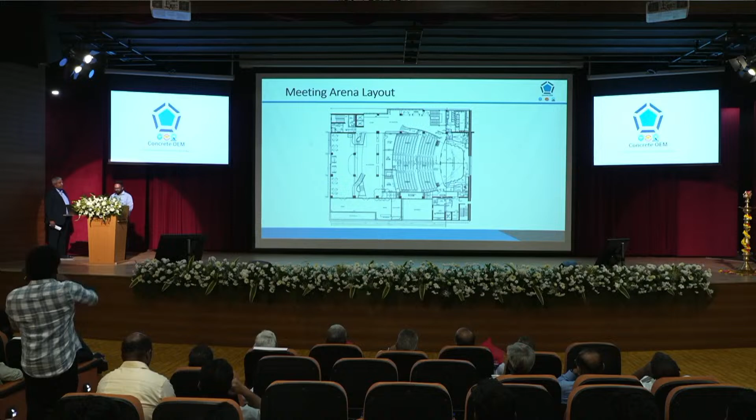The same procedure goes for the dining area on the 6th floor. When you hear the alarm, please remain alert and prepare yourself for any possible evacuations. And please leave the floor immediately by using the exits which is nearest to you.

Proceed to the nearest emergency exit, which is located on the front and back of the floor, as mentioned earlier. After reaching the 0th floor, exit via the main entrance and gather at the assembly point to the left of D block. Do not use the elevator in case of fire or earthquakes, and do not crowd the doors.

There is no smoking permitted inside the auditorium, and please put your phone on silent.

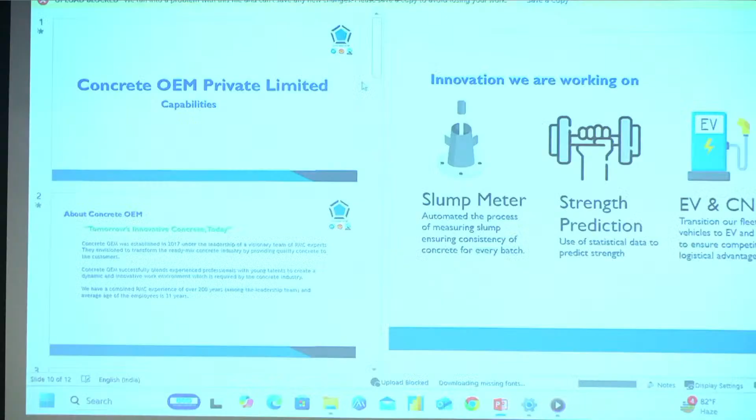So if you see in the video, it's very clear our tagline is mentioned as 'Tomorrow's innovative concrete today.' So, to brief you, Concrete OEM was established in 2017, which is almost 7 years now, when many of them asked me, sir, what is OEM?

As you all are aware, we brought the concept of Original Equipment Manufacturer, trusted and worthy, from the mechanical industry to the civil industry. That is how our managing director thought of this concept of having OEM interlinked with concrete in the ready-mix industry. That is how we got Concrete OEM Private Limited established in 2017.

So we have a leadership team of RMC experts that have provided experienced solutions wherever required, and it has been blended with different professionals. Each and every process has several experienced people. Our average employee age, if you see, is just 31 years, and we have an overall experience of 200 years of professionals working with us.

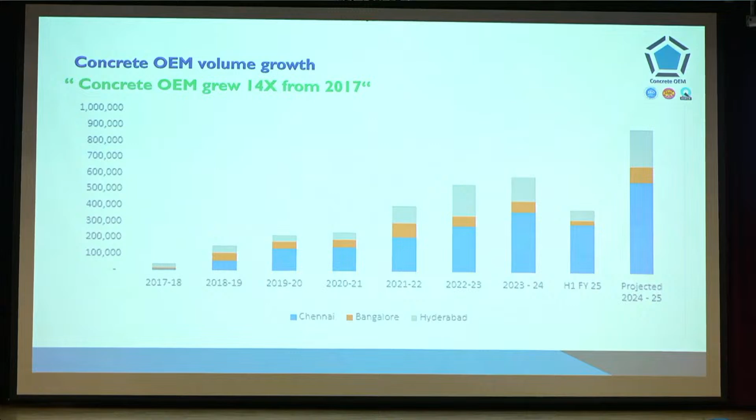So if you see OEM's growth graph, a clear picture is provided in the presentation. In fact, in 2020-21, we were just 2 lakh cubic meters, whereas by the first half of 25, we are almost 4 lakh, near to 4 lakh, and we are targeting a volume of 9 lakh by 24-25 end overall, into 26 as well, you can say 25-26. So we need all of your support in order to grow all of us together.

So our capabilities, as I mentioned, we are established in 3 states - Tamil Nadu, Karnataka, and Telangana - exclusively Chennai, Bangalore, and Hyderabad. Overall, we have 14 plants, 33 pumps, and capability and own assets of 175 transit mixers, and a strength of 400 employees as of today, within 7 years. As a capability, we concentrate on zero accidents, assured quality, faster service, value engineering, innovation, and also moving towards ESG.

So when you ask what our core value proposition is, what is the difference, what are our core values - we can say we give faster service, and also tailor-made, value-added engineering. We understand the customer requirement exclusively, their specifications, then we design the required product which needs to be understood. Even their structural consultant - sometimes we give the explanation to their structural consultant on what is the requirement of high cementitious content, what is the requirement of durability. So we tailor-make the products.

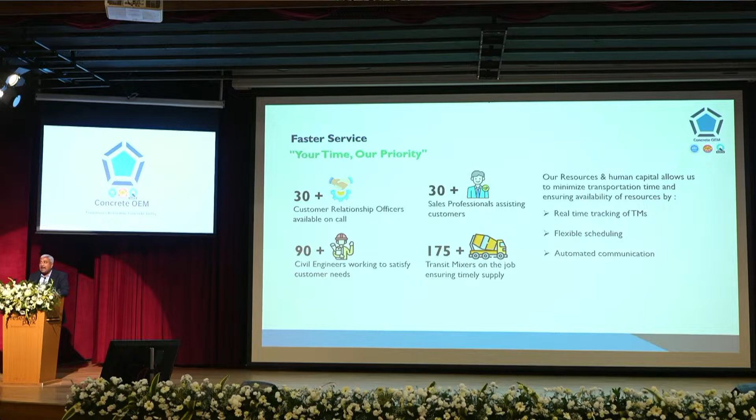We also have 30 plus professionals in each state, and 90 plus GETs have been recruited, all engineers and civil engineers employed in our organization. We have more than 175 transit mixers currently, and as and when we require further, we also take on hire on a day-to-day basis whenever it is required.

As I said, we have already placed 1.2 lakh cubic meters on site with a few of the contractors, where we supply, place, and cure it. Based on the last 3 months survey, we have got 850 plus satisfied customers, and we always target erecting our plants within a radius of 8 kilometers so that we can easily serve our customer needs.

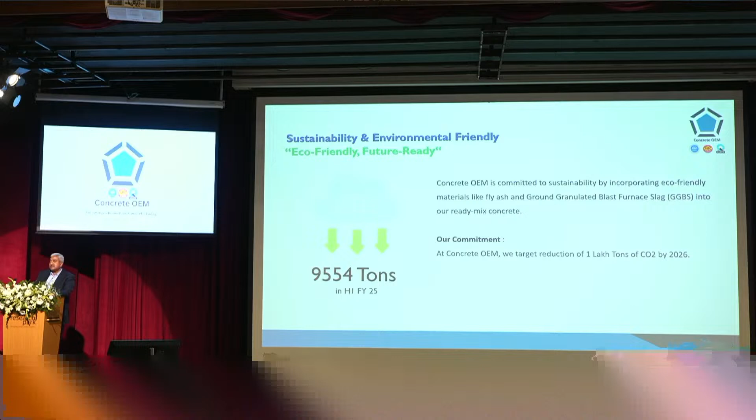So we are moving towards eco-friendly practices. We have saved almost 9,554 tons of CO2 emissions, and we are targeting by '26 end almost 1 lakh tons with the help of all of your support.

When it comes to innovation, we are sending almost 20,000 plus messages through the CRMs to the customer. So once we start batching any truck, you will be having an auto-generated message.

The message includes the customer name, the project name, the grade, the TM number, and the TM driver name. Additionally we'll be having a GPS location so that the customer will be able to track the vehicles.

That is how per month we are sending almost 20,000 messages. Every transit mixer, for example in Chennai, all 60 transit mixers are totally equipped with dash cameras in the front as well as the back. So any accidents, theft, or if the driver stops on the road, we will know what he's doing at each minute, captured with back and front cameras.

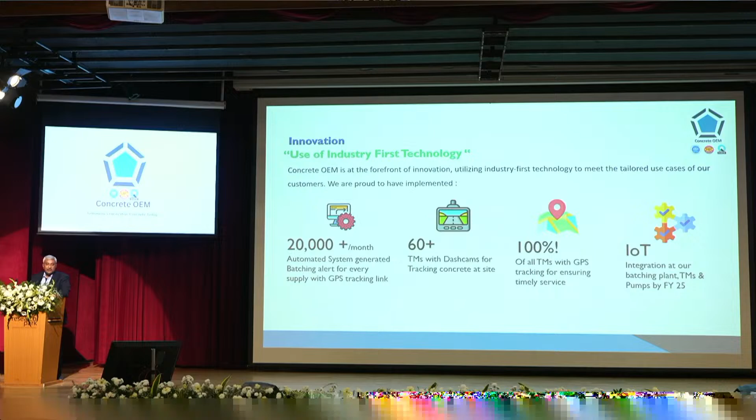And as I said, we are 100% GPS equipped. We are also integrating with our batching plant as well as pumps, and very soon we'll have our integration systems adopted.

In terms of innovations, we are working on slump meters as well as strength prediction, and we are moving all our equipment towards EV and CNG, and we want to make all our reports digital. This is how we are moving forward with innovation.

Our aim is to expand across India, across different states. We want to spread and expand our wings, but in a professional way.

Recently in Hyderabad, we started giving quality assurance for one of the projects. For a few projects, upon completion, we started giving quality assurance from the bottom, since those buildings are totally supplied by us, so time to time we do durability tests. Not only that, after completion of the project we also ask the structural engineer to kindly advise where we need to do sampling, and we submit the quality assurance certificates in cooperation with some certified third-party laboratories. Also, every pour, we have keen, neat, and transparent customer satisfaction data feedback.

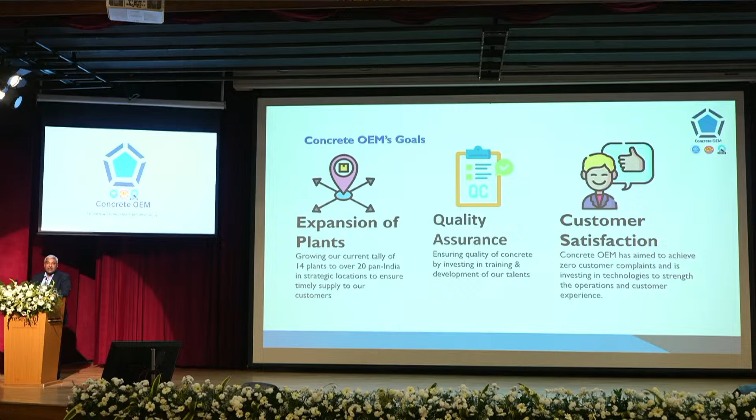Recently, we completed a single pour of 3,800 cubic meters of high performance concrete in Hyderabad in a single shot. In fact, the second pour started today, sir, it's going on, and it's also again a huge quantity.

We are also capable of doing lightweight concretes through foaming agents as well as beads, with densities of 800, but average you can say 1000 kg per cubic meter. And for temperature control, 3 days before, here itself behind our auditorium, we did one pour where the required placement temperature was 26 degrees centigrade, and we are often doing this in Chennai.

So these are our few of... Thank you very much for listening to me and having patience with me. Thank you.

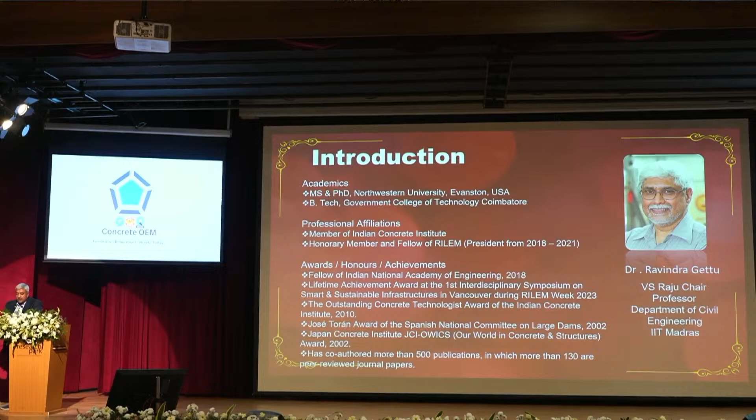Gettu sir did his BTech from Government College of Technology, Coimbatore, and an MS and PhD from Northwestern University, USA. He is also a member of the Indian Concrete Institute, an honorary member and fellow of RILEM, and served as its president from 2018 to 2021. Among his many awards, I'll mention a few: Fellow of Indian National Academy of Engineering 2018, Lifetime Achievement Award at the first Interdisciplinary Symposium on Smart and Sustainable Infrastructure in Vancouver during RILEM Week 2023, the Outstanding Concrete Technologist Award of the Indian Concrete Institute 2010, the José Torán Award of the Spanish National Committee on Large Dams in 2002, and the Japan Concrete Institute's Our World in Concrete and Structures Award in 2002. He has co-authored more than 500 publications, of which more than 130 are peer-reviewed journal papers. So sir, please welcome onto the dais.

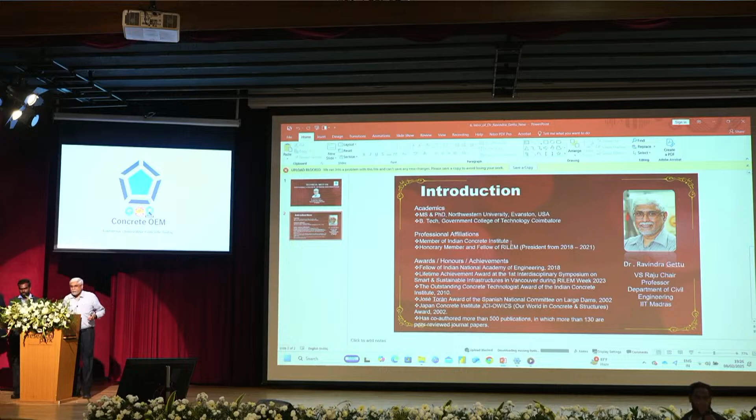Good evening. Great to be here. I'll try to be as fast as possible so that you don't have a delayed dinner and have time to listen carefully to Manu Santhanam. So we'll talk about challenges and opportunities in construction.

I'll introduce our center, the Center of Excellence on Technologies for Low Carbon and Lean Construction. Then I'll talk about some issues with concrete construction, specifically a little bit on plastic shrinkage cracking, fiber reinforced concrete, and sustainability assessment.

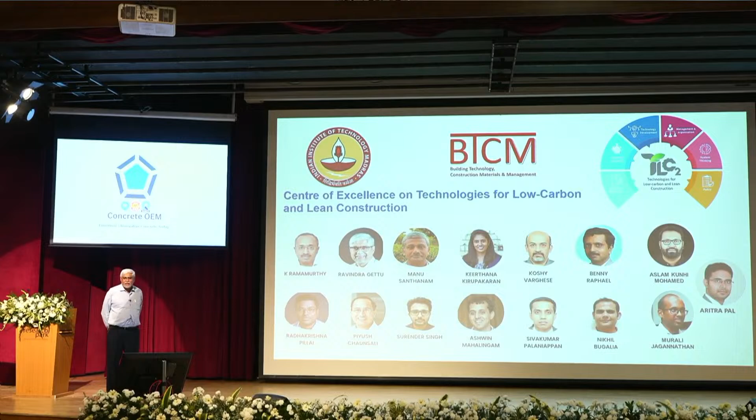Professor Manu Santhanam and I come from this Center of Excellence, led by Professor Manu, who is also our Dean for Industrial Consultancy and Sponsored Research. This is our group. Our newest member is Aritra Pal, who is also here. He started off on concrete and somehow switched to computer-based vision, but he is very much in construction. So we have a very young group, and I am the oldest around, with an average age of around 40. It's a very dynamic group which works on construction materials, construction management, and building sciences.

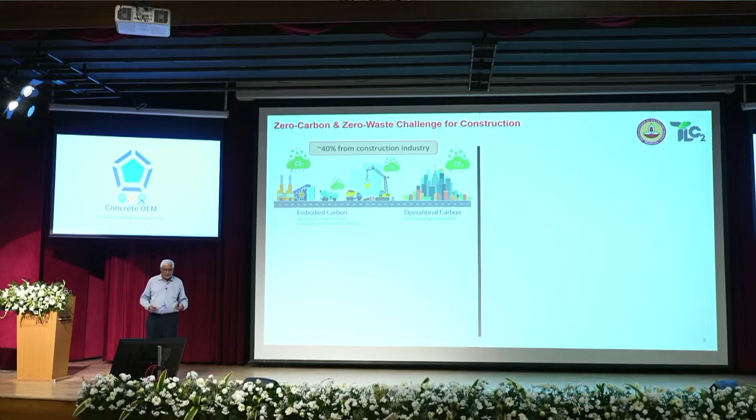Our mission is to work towards construction which is zero carbon, that is zero environmental footprint, and zero waste. It's a tall order, but we feel this should be the mission. The reason is there is a lot of embodied carbon in our construction. When you build a building or a bridge, there's a lot of carbon footprint that has gone into it. There is improvement in the operational part - we have LED lighting, fans that consume less electricity, more efficient air conditioning - but you are stuck with what you have constructed with. That is the embodied carbon, embodied energy, embodied impacts. So we want to work on that and decrease it.

On the other hand, we know there is a lot of waste. All of us in the construction sector know we generate a lot of waste. If we are going to build more, we are going to demolish more. So this keeps happening. To change it, we have to work on different aspects, not just in the lab. We have to change policy, specifications, how contracts are written, how tenders are awarded, and so on, up to taking new technology into the field. So we believe this transformation, this translation, has to happen, and as a group we would like to work on that.

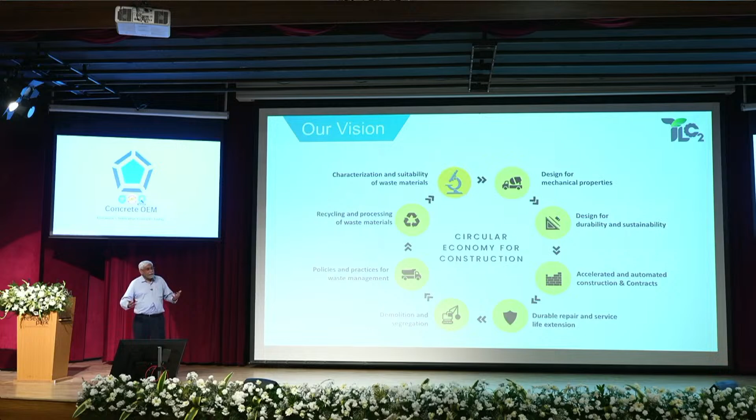Our vision is to touch upon and try to influence the whole life of a project, starting from the material and mechanical properties, which is what the designer is worried about, sustainability, which everybody should be worried about, durability, which is very important, looking at new technology for automation, and durability again in terms of repair - how do we repair so that we can extend the life of the structure. Then if we don't have any other choice, we demolish, and see if we can recycle and so on.

So how can we work on different aspects? As I said, we have a big group working on different aspects of this. We can hope that construction someday will be zero carbon, zero waste, and have significantly little embodied energy and embodied carbon.

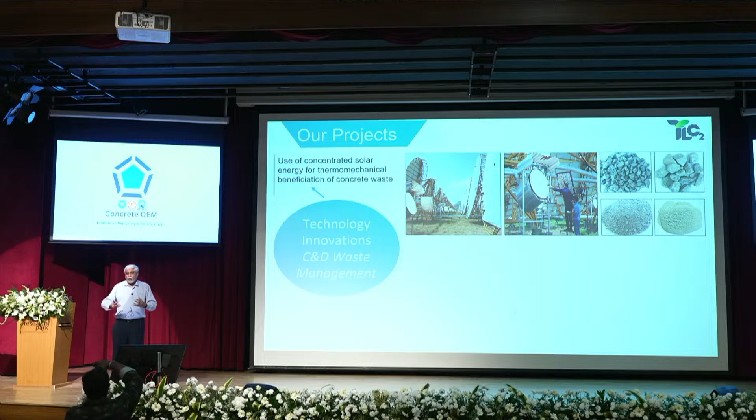So we have been doing things, not only in the lab, but taking things out. We did some work on recycling of concrete, making it into aggregates and material that can be used in construction. You require a lot of energy for this.

So we said, can we use solar energy? In India, we have a lot of sun. So what we did is we zapped the concrete with very high heat using a plant near Mount Abu, where they have huge reflectors that concentrate the heat. There's no conversion from heat to electricity, we just use it directly. We found that you could separate the concrete very easily, so that the aggregates can be put back in, and the hardened cement paste can also be put back in.

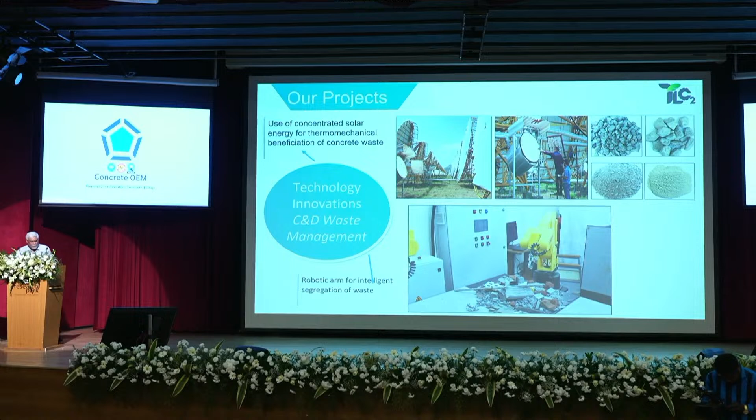Then we have the case of mixed construction waste, which has plastic, brick, and all that. Right now we have people who have to pick everything out by hand. So can we have robots? Can we have robots with vision built in that can recognize and take this out? This is something that we are working on.

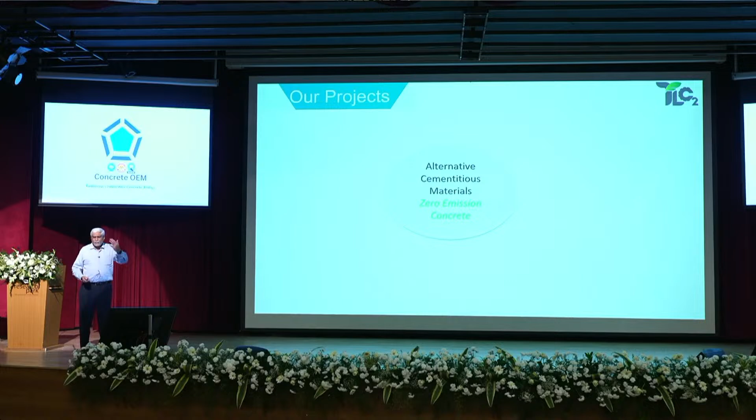Other projects, we are working on alternative cements, things that are not just ordinary Portland cement, but could be from agro-based waste. As an agricultural country, we have a lot of waste coming from agriculture. Can we put the ash from that to use? So we've been doing stuff - we've used it in landfills for very low strength concrete, and we've made bricks, which has been out there for more than two years.

We have done a lot of work, as you may know, on LC3, which is limestone calcined clay cement. Additionally, we are looking at low-grade limestone that cement companies cannot use - it's just lying around there. Can we use it for concrete? Professor Manu has been leading this work.

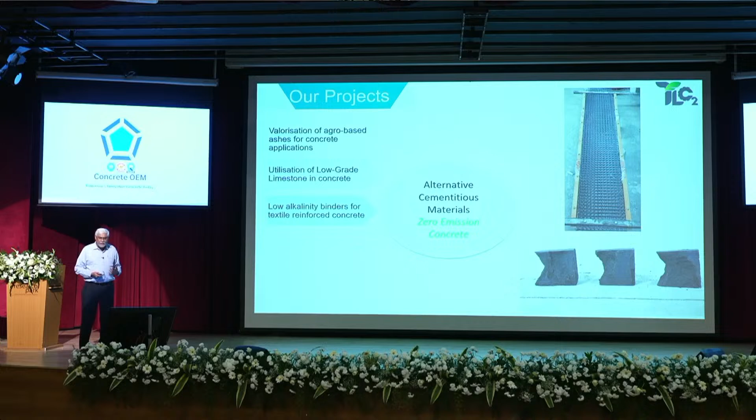We are also looking at alternative reinforcement. We know that corrosion is a problem - can we make structures without steel reinforcement? So we are looking at carbon, we are looking at glass reinforcement, and seeing how binders can also change. We are looking at new types of cement like CSAB cement, calcium sulfoaluminate belitic cements.

With LC3, we are now very happy that it is a standard. Cement companies can produce it and structural engineers can design with it, and we can have buildings. We have also taken waste clay, which people do not want to use, and made structures. This tetrapod has been done with the help of L&T - it's an L&T project where they are doing it. We have also done a small building, and other buildings, to see what the life and durability of it is.

Another thing close to my heart is water. For concrete we need good water - we have always learned, we tell people you have to have good water. But we need water also for people to drink. In a place like Chennai, you see people standing in line for water. So what is the right thing to do? Should we insist on good water being taken away from people and put into concrete, or do we look at other sources?

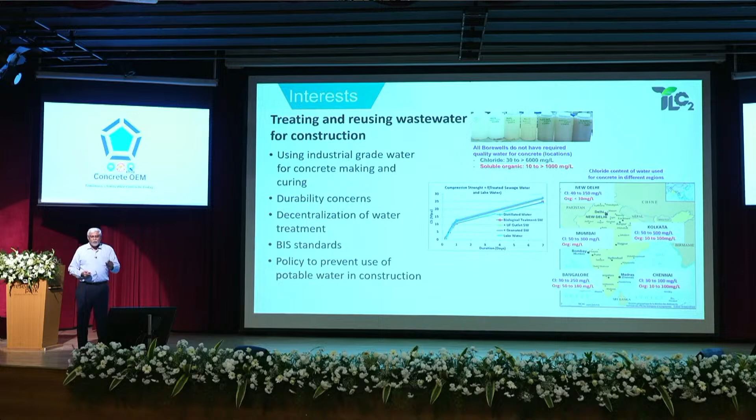So what we said is, can we take water from sewage? Can we mine water from sewage? Partially treated water - not used for drinking - can we make concrete out of it? We went to different places and did this. Concrete OEM allows us to do it, and this was from one of your competitors. We found that concrete made from sewage water was better than concrete made from groundwater in those plants, because groundwater is brackish and has dissolved solids, while partially treated water was giving even better results. I wish one day there'll be a government order which prohibits us from using groundwater and fresh water for concrete and other industrial applications, and forces us to use sewage water, or water coming from sewage that's been treated.

So these are some of the things that we have been doing. But let us talk about what is the process of doing something differently.

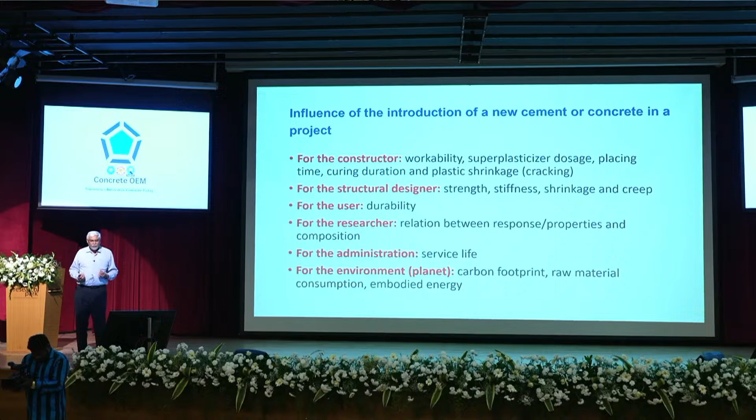So in our center, we are doing a lot of things with new materials, innovation, and so on. And there are a lot of challenges, as all of you will appreciate. One of the big things different between our sector and everything else is that we have multiple stakeholders. You have heard from a concrete OEM - they are a stakeholder, they give good concrete. But somebody has to use it, somebody has to specify it, and somebody has to live in it. So when concrete and cement change, different stakeholders and players come in touch with it. All of these people have to be convinced.

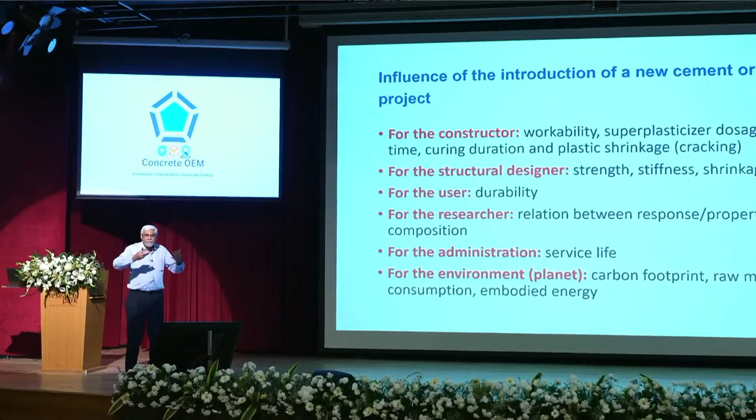So when you have a new concrete - for example, when we tried to introduce LC3 in the market - the constructor, the contractor, what do they worry about? They worry about workability, they have to place the concrete well. They are worried about superplasticizer dosage. They are worried about plastic shrinkage. So this is their concern.

The structural designer has a different set of concerns - they talk about strength, stiffness, creep, and shrinkage. The user is worried about durability: how long will my bridge last? They don't really care whether you use M30 concrete with LC3 or OPC. I want my house to last a long time, I want my bridge to last as long as possible.

Now the researcher gets in the middle and has to connect all these things, make a prediction, a model, and convince people. So the researcher has to take the composition and predict durability, strength, long-term behavior, and so on. Finally, the administration - what do they want? Less waste, buildings to last long, longer service life. And for the planet, what do you need? You need sustainability - therefore less energy consumed, less raw materials, less carbon dioxide. So this makes our sector and concrete so challenging. It's a simple material, but many, many people have to be involved and accept any change, and that is where things also go wrong, as opposed to other sectors.

So a lot of issues are there with concrete construction today. A lot of you will probably even see more issues, but I've listed some things of concern. There are a lot of cases of plastic shrinkage cracking. People complain: I used RMC and it cracks. I don't know if concrete OEM will have the same problem, but I'm sure they do not - but generally this is a concern. Cracking - I'm using RMC, therefore there is a crack. I never got this when I did site-mixed concrete. You have cracks appearing after a week, thermal shrinkage - where did this come from? Long back it never happened.

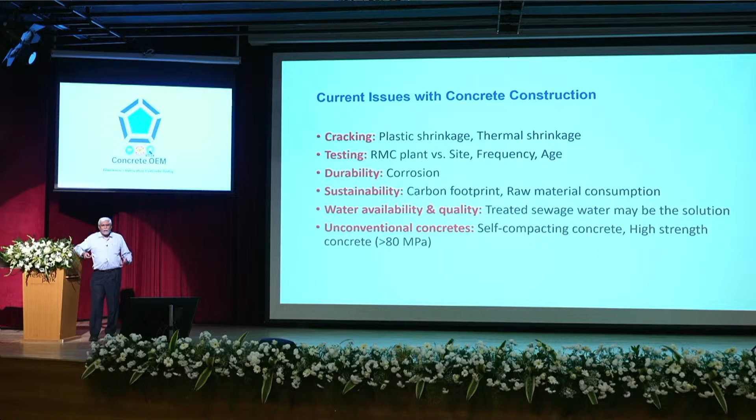Who should test it - should the RMC plant test it? Should I test it? How do I test it? What age should we test? GGBS and fly ash keep on gaining strength - should we test at 56 days, 90 days, 28 days, or 7 days? Corrosion is a big problem, becoming more and more of a problem as our buildings and structures last longer. Sustainability, as I told you, is an issue. Water.

Unconventional concretes - we know the advantages of many new types of concrete. Can we use them? Can I just pick up the phone and say, deliver this concrete? So these are issues that are there - probably there are more. If you have issues that today are prominent in the construction sector, I'd like to hear about them.

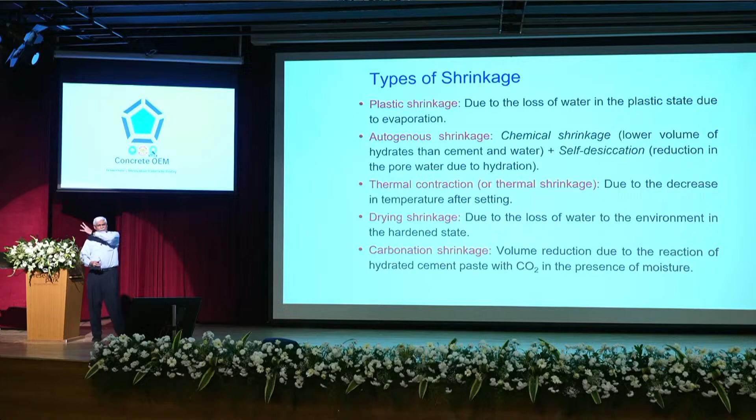I like to focus on a few things which I believe are important to revise - I'll go through it fast, and if you have doubts later we'll go over it quickly. Cracking is of concern. Cracks sometimes happen fast, in a few weeks or months; some happen much later. Now, shrinkage is a cause of concrete cracking when there is no load yet on the structure. If it happens very fast, when the concrete is still fresh, it is plastic shrinkage cracking due to the loss of water in the plastic state. Then afterwards, especially when we use high-strength concrete with very little water, the concrete dries up internally - this is called autogenous shrinkage.

Then the concrete also is picking up heat, so all cement reactions are exothermic - the concrete is hot. If you touch concrete after 1 day or 3 days of high-quality concrete, you'll see it's hot. But the environment is cooler, so it has to contract - the outside is cooling, inside is hot, so it cracks. That is thermal contraction or thermal stress-induced cracking. Then you have drying shrinkage, which happens over a long period of time - this is what all of us have studied. We have not studied much about the others, which are more important today because you are using less water, higher cement content, finer cement, and higher grades of concrete.

Carbonation shrinkage, again, will become less and less important when we go to higher quality concrete. Anyway, this occurs over a large period of time.

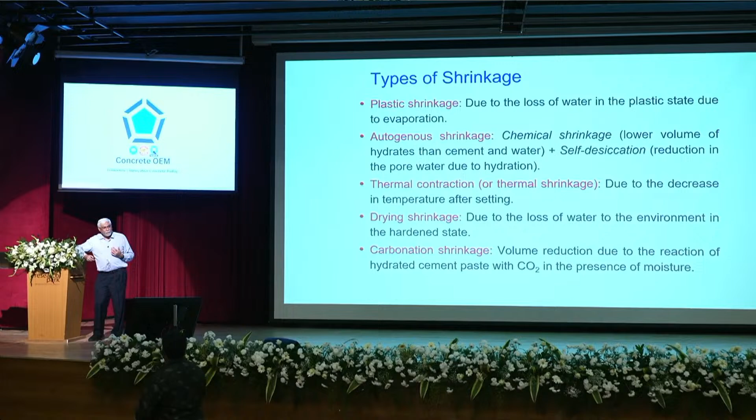This is important for consultants also. If you are a consultant and somebody calls you and says my structure is cracked, the first thing you should ask is when did you see the crack? If they tell you, I just concreted it and there's a crack, that's plastic shrinkage. If it happened over a couple of days or a week, after demolding, that's thermal shrinkage. If a diaphragm wall is cracking after several weeks, then it is autogenous shrinkage.

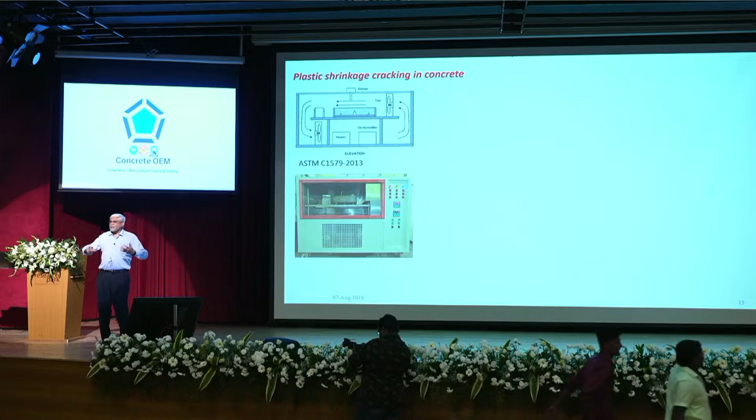This is something we should start thinking about, learning that if there is a crack and the structure is not yet loaded, ask when did you see the crack, and from there understand the problem and the cure. Plastic shrinkage cracking is becoming very important, not only because of our climate, but because we are using more cement, and cement that gains strength slowly.

One of the things we have done in our labs is look at slabs of different types of concrete. We blast them with hot air and see how they crack. We find that if you compare ordinary Portland cement with concrete made with PPC and PSC, PPC will crack earlier if you do not cure it, and it will also have larger crack widths.

What do I do? I'm not telling you to stop using PPC or PSC. We have to cure better. We have to cure faster.

When I talk to people and ask when do you start curing, a lot of people say next day. I don't know if it's still prevalent. How many people will say differently? And if you made the concrete on a Saturday, when do you start curing? Monday, because it's a holiday. Sunday, you don't expect me to come and cure the concrete.

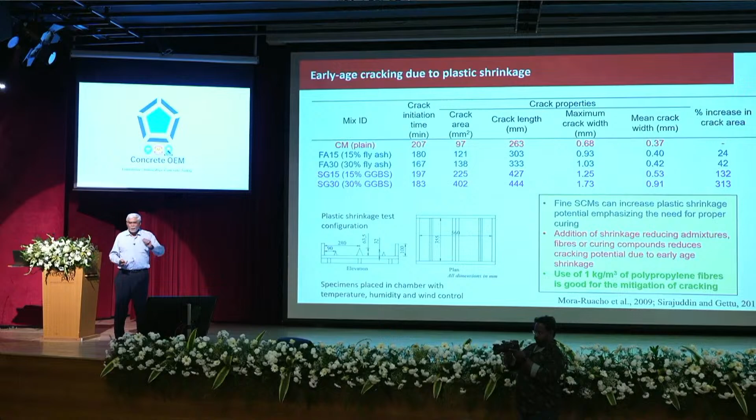You cannot push your thumb inside. This is very important for concretes which have fly ash, slag, and so on. If you cannot cure, then put a little bit of polypropylene fibers. Just 1 kilogram of short polypropylene fibers will help probably eliminate the plastic shrinkage cracking.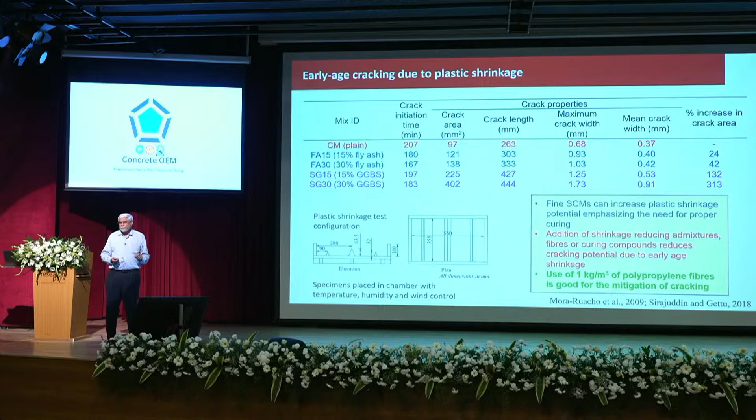It's a very simple cure, we don't have to panic. This can be done and has been shown to work. Otherwise, you will have cracks like this, pattern type cracking, random cracking - this is usually plastic shrinkage cracking.

Thermal shrinkage, as I told you, happens later when you have thick elements like a raft. Professor Manu can talk about many case studies where he's been involved as a consultant. So you have cracks easily happening in rafts, podium slabs, all these things. We are making very thick elements, we are making huge columns, so there can be a lot of problems.

I know somebody here is going to say these numbers are over-conservative - and that's why most people don't come to me - but when there is an issue of thermal cracking, I would say internal temperature should not be more than 70 degrees, and the gradient between outside and inside should not be more than 20 degrees.

There can be exceptions, we'll discuss case by case when the case arises. But in general, the inside temperature should not go more than 70, because much beyond 70 concrete starts drying up, you get changes in the microstructure. And if there's a big gradient from inside to outside, the outside cools faster, and to accommodate the contraction, it cracks. So thermal temperature and heat is very important.

So what should you do? You cannot throw your hands up and say, in India I cannot use concrete because the temperature is always high. Cool the concrete. We just heard from Jagannath Rao sir that you can deliver concrete at low temperatures.

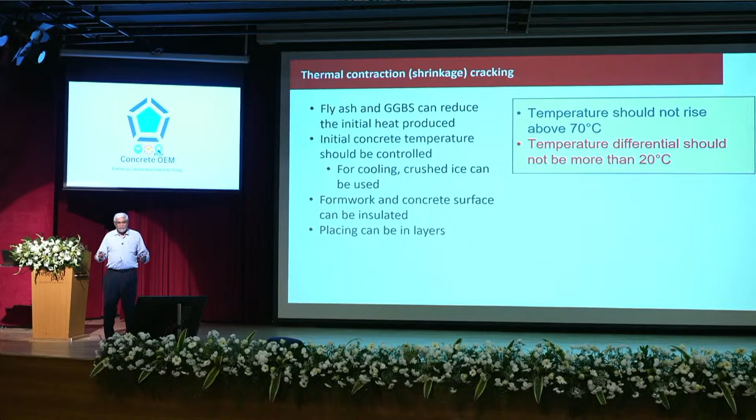Also, we can insulate the surfaces so that the cooling doesn't happen outside when inside is very hot. Insulate the surface so that the temperature gradient is not that much. So these are some of the things that we can do, and if there are questions, certainly we can take them up and discuss.

I'll also want to touch upon two other things quickly. One is fiber reinforced concrete. The reason is, we are doing a lot of metro construction, and there is interest being shown by several metro companies in India in using fiber reinforced concrete.

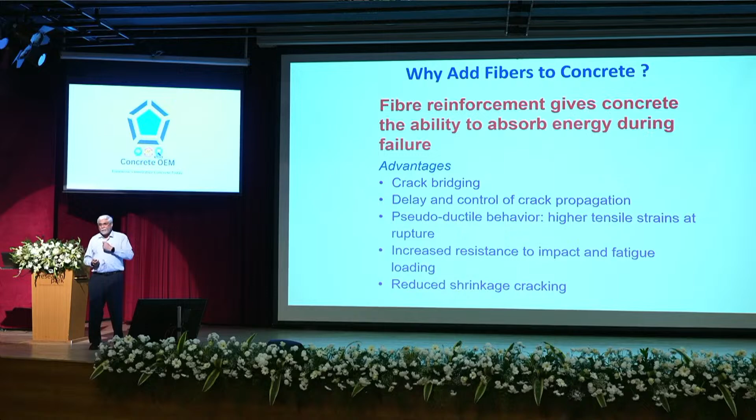What is fiber reinforced concrete? It's concrete where you mix in fibers, so the truck comes to you with the reinforcement, with the fibers. What do the fibers do? They help arrest the cracks. They absorb energy, don't let the crack open. They are stitching the crack, so the crack is not opening. They are bridging the crack.

Fibers are not added to increase strength. Again, some people say, I put fibers so strength should go up - no. If your strength should go up, decrease the water cement ratio, don't add fibers. Fibers are not there at the dosages we use to increase strength. It's a misconception again that we have to get rid of. Fibers are not meant to increase strength. If I want compressive strength to increase, decrease water cement ratio, use a good super plasticizer, and ask for a higher grade.

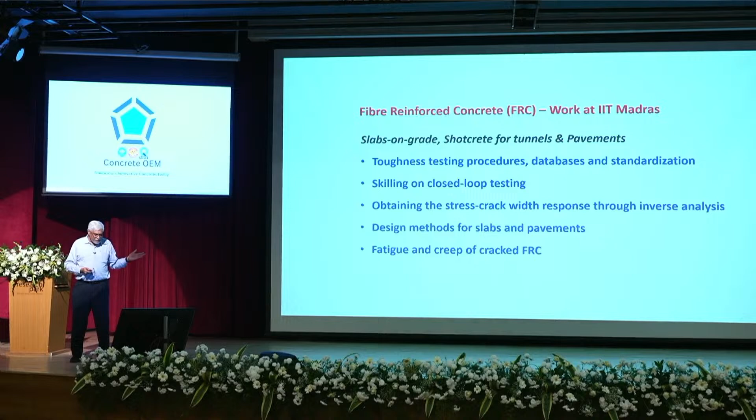And there have been a lot of cases. This is a yard where the point load capacity, the axle load capacity, was 100 tons that we did. Nearby in Chennai, we have overseen or checked the design for a large floor, prefabricated elements like this. We have done a lot of work, and we can help where you need help for warehouse flooring, shotcreting, and so on.

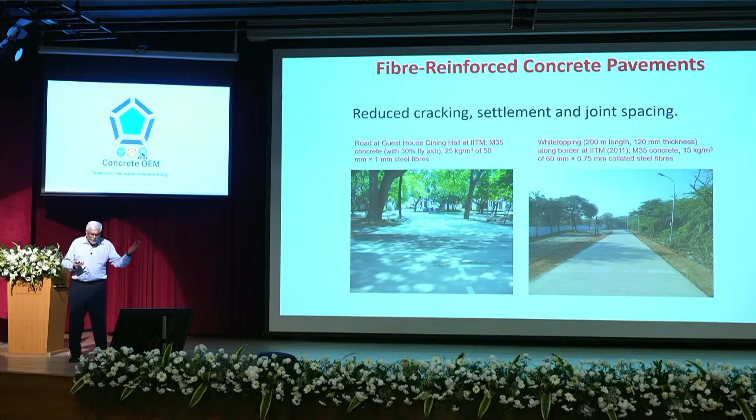In our campus, we have the luxury of trying out things. So if you come to our campus, you will see a lot of roads made out of fiber reinforced concrete, and they've been around since 2007. I think one of these roads was 2007 or 2009.

So a lot of things are possible. We have to have the opportunity and be ready for it. So metro tunnel lining, there are opportunities. There have been cases - this is the case where long back we had sacrificial lining done for Chennai Metro. It was successful, and now again they are doing it. L&T people are here, they are the ones promoting this.

So this could happen. In Patna Metro, we completed the entire design. It is waiting for the third-party designer to check, but a complete design was properly done and defended, where we are looking at the complete metro to have just fiber reinforced concrete instead of regular reinforced concrete.

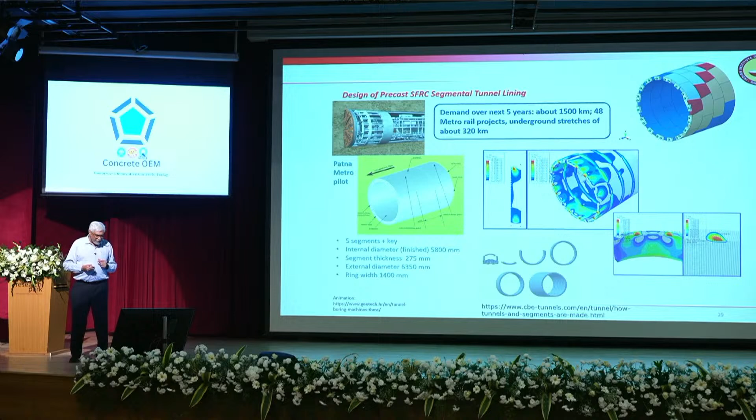So again, it's possible. The last thing I want to touch on is environmental impact. Everybody talks about sustainability, but how do we measure it? Can we think of a number? Can we choose a concrete that is sustainable?

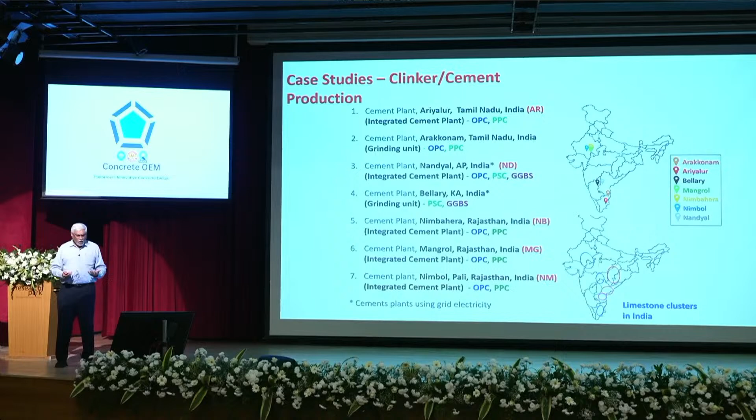The technique that we generally use for quantification is called life cycle assessment, and I'll quickly go through and tell you how to do it, because we don't have a database. Our software are there, but we are not sure if it's ready for India or not. So what we did is we went to different plants - I'm showing you this, it represents the different clusters, limestone clusters.

I'll show you the results of one plant in Nandyal. So we go to the plant and ask them, what are all the things that went into your cement and clinker? For a ton of clinker, a ton of cement, what are all the materials which go in? And we find things which are not there in textbooks - we find, in a lot of cases, or most cases, that there is no clay added to the raw meal.

I don't know if this is my phone or somebody. No, not my phone.

Yeah, sorry, it's my smartphone, which is not very smart.

So in Nandyal, we went there and asked them what do you put into your raw meal to get cement. We found that they don't use clay. They use a lot of other stuff - flue dust, red mud, laterite, GBS, and lot of waste material.

In our cement kilns, we are already consuming a lot of waste. Lot of pharma waste goes in.

And the story I always like to tell - probably many of you have heard - is, you remember when Maggi noodles were taken out of the market? It was in the news. Anyone remember the story? What was in the noodles that you had to remove them? Lead. Yeah, lead. And therefore it was taken out of the market. So Nestle had to take all these packets of Maggi noodles. Where do you think they went?

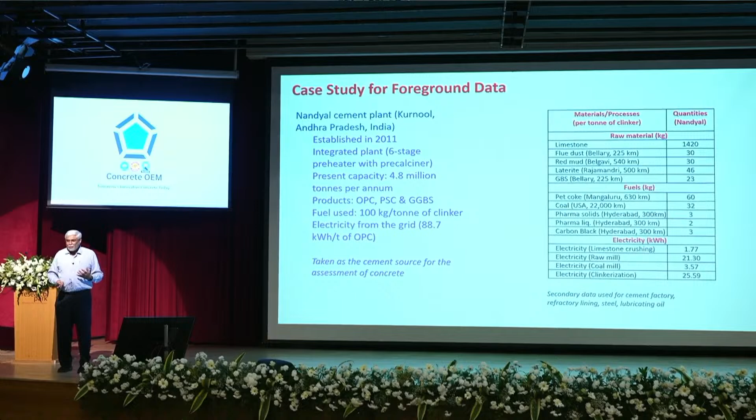Into Ambuja cement. True story, I'm not bluffing. So it went into the kiln. So all sorts of things go in.

So cement is good. When people complain to you and tell you cement is bad, tell them, where will you put so much junk other than cement? So cement is a good sink for certain things. Whichever has calorific value, you can use.

And also fuel - we believe that it's all coal we are burning. No, we are using pet coke that is not used by other industries. So there are a lot of good things about cement manufacturing that you can learn.

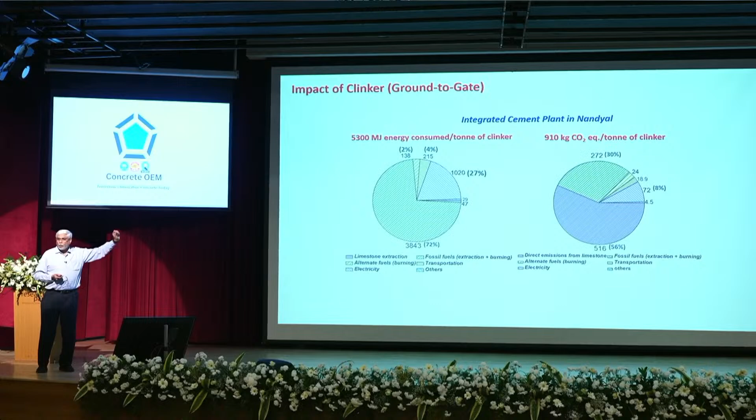But our concern is, what are the emissions? We find that there is a lot of carbon dioxide coming out with every ton of clinker - about 900 kgs in this particular plant for a particular time. It can vary a little bit. For every ton of clinker, there is at least 900 kg of CO2 emitted. A lot of it is coming from the conversion of limestone to calcium oxide, from the burning of coal and so on. There is a lot of energy also which is needed, fossil fuel.

Can we do something better? People are working on it. Now if you calculate for different types of cements, the good thing that comes out is when you go from ordinary Portland cement to PPC to PSC, you reduce the CO2 without sacrificing strength or durability. Durability can even become better. The only thing is your early strength that you have to design for. So actually it becomes better because you decrease the amount of clinker.

Same thing with energy. Now if you go on to concrete, again you find that concrete with fly ash, with slag has less energy, less carbon emissions. Higher grade concrete is even better - it's more efficient to use higher grade concrete. So if you have a choice between M20 and M30, use M30. It is going to give you better durability, smaller elements, less carbon emissions, more efficient.

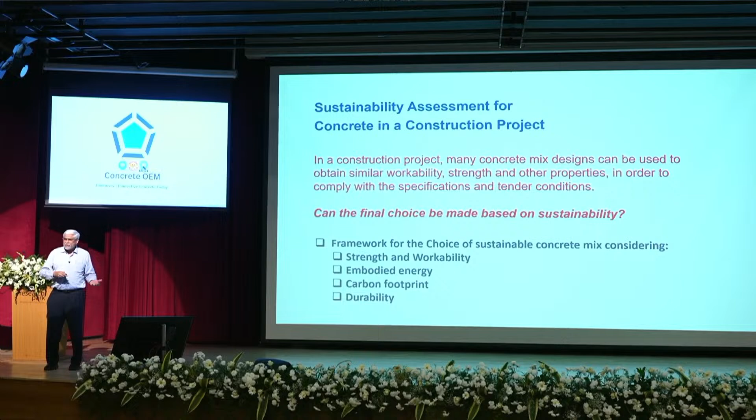So the question is, it's nice to talk about all this. How can I choose at the site a concrete that is sustainable? There are infinite mix designs. A lot of mix designs can give you the strength and workability. How do I choose? So what we said is, can we put together strength, workability, carbon emissions, energy, and durability together? And we came up with two numbers.

One is called the energy intensity, which is energy consumed for making a cubic meter of concrete divided by the compressive strength. So we keep in mind the compressive strength also, which is important for structural stability and safety. We find that this energy decreases as you increase strength, and it flattens out. It's not that you should use very, very high strength unnecessarily. Higher the strength, mostly, it will become more efficient in terms of energy per megapascal of strength.

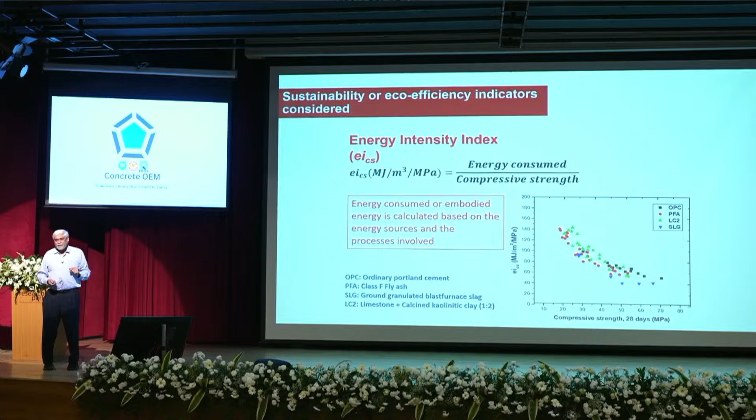The other thing we call an apathy index. Apathy means you don't care, because most of us don't care about durability, don't care about carbon emissions. You are listening to me because you have to - otherwise you don't care. So we said this we have to decrease, this apathy we have to decrease. So we came up with an index of carbon emission divided by durability, and we call it an apathy index.

And what we found is, out of different choices of concrete, if I make a plot like this, with y-axis I have apathy index, x-axis I have energy intensity, what is in the lowest corner is more sustainable, because I've tried to take into all these 4 aspects and come up with this number. You can do it for a lot of concretes - we did about 30 mixes we analyzed, same thing. So this means that you have a choice.

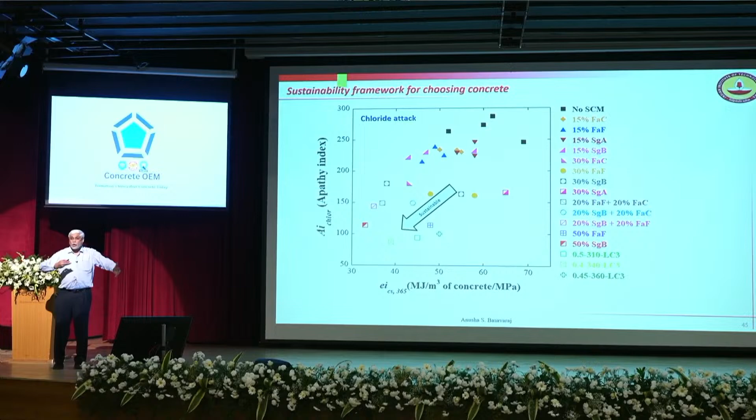You can choose. Generally, if it is chloride attack, you will see slag is better, fly ash is better, ordinary Portland cement is the worst. We think ordinary Portland cement is the best. It is pure cement. It is the worst for concrete in Chennai. If you are making it on the coast, it is the worst concrete you can use.

And that is what Professor Manu Santhanam will be talking about in the following lecture.

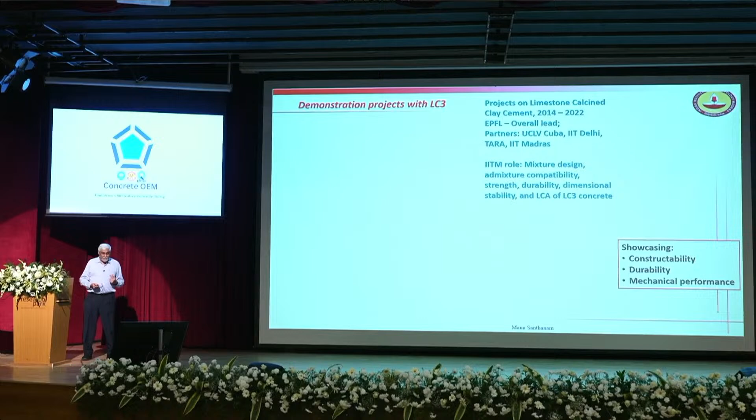So we've done trials. We've done all these LC3 things. We have shown how it is important. And very importantly, we have done a bridge also. We are just not talking lab stuff here. We are not talking theory. It is not just a paper.

This is what I'm talking about. We can change. No sacrifice of strength, no sacrifice of workability. However, my life goes up to 125, theoretical, obviously. Theoretical, calculated with proper models. From 30, it goes to 125. Carbon dioxide savings in just one span, 230 tons of CO2 has been saved by looking at durability also, in addition to the usual strength and workability.

We had a chance to work with L&T on the foundation of the Ayodhya temple. Again, you might ask, Professor Manu Santhanam was heading the team, so he can give more details. So you can again ask, 1,000 years, you guys are going to be dead. Of course, we'll be dead. But we have models which can show that you can have. And it's not a secret.

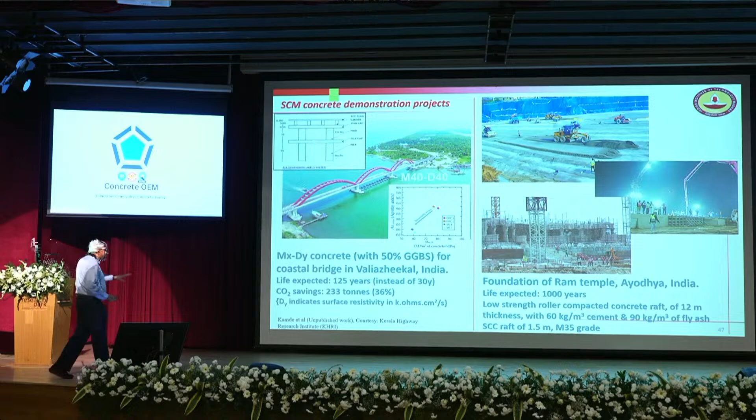Okay? Now you have to change your mindset. You have to forget reinforced concrete design 1 and 2 and advanced concrete design, all that you forget. You think of concrete now as a rock. And you have to design as if it's a rock. That's what was done. So layers of concrete were poured to give this raft on which the Ayodhya temple is sitting.

So to conclude, if you are talking sustainability, we have to think differently. We have to think about low carbon cements, higher quality construction, extending durability, which is very, very important, and you will hear in the next lecture. Recycling has to come in. We have to start recycling. We have to decrease the water demand because water is a precious commodity.

People say that a few wars soon will be fought for water. And we have to look at new composite systems. Why the whole thing? Why the same thing? Why can it not be different? So with that, I'll stop. Thank you very much.

So maybe we can take questions later together? No, should we take questions after, let Manu finish and we take questions together, Manu? Yeah? Yeah, so we'll have it together. Yeah, I think so.

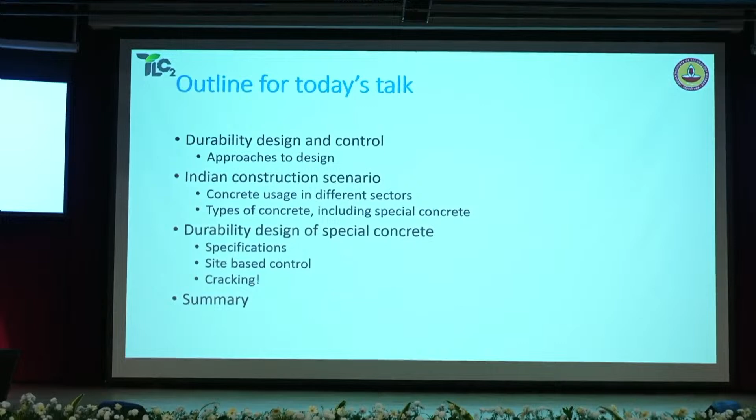So I'm going to talk primarily about that, challenges in implementation of durability design in concrete construction projects in India. Much of it will be based on some experiences that we've had consulting with different companies and trying to understand how concrete in the field actually behaves. That helps us a lot in embellishing our lectures in the class also. Hopefully it encourages our students to also look at concrete technology as a profession to follow on.

So I'll talk a little bit about how durability design is typically done. How do we control durability on site? What are the different approaches on site for durability design? In the Indian construction scenario, how is concrete utilized? What are the different types of concrete that are used? And where durability design is typically applied? That's something which maybe the audience here may also be well versed with, but I'm sure that they can also give some more pointers if I'm not perfectly right in my assessment of what kind of concrete is being used and how much of it is being used.

Then I'll talk primarily about durability design of special concrete and look at some issues related to specifications, site-based control, and cracking. Of course, cracking, Professor Gettu has already introduced this subject earlier, but I'll touch upon a few case studies where some pre-planning could have helped in avoiding much of this cracking.

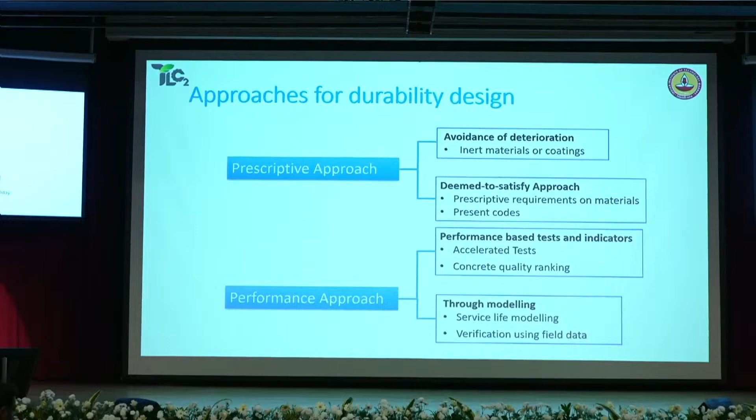Again, this is something that if you've heard me talking on performance-based specifications, our team at IITM talks about this everywhere. The idea is that we are moving increasingly from a prescriptive approach to a performance-based approach. What this means is I do not need to know what exactly is there in the concrete as long as it gives me the right performance. Just like when you buy a light bulb, you go to an electric store to buy a light bulb, and you don't necessarily have to find out what the thickness of the filament is, right? As long as the person in the store is able to put the bulb in the socket and show that it's working, you believe that it's fine. So that's the idea of a performance specification.

Of course, in concrete, we can't say that, okay, put the concrete, then I'll see how it behaves. So there, you need to control it, obviously. You need to control the performance or understand the performance using some indicators, which are basically performance indicators based on accelerated tests that can help you give a quality ranking to the concrete mixtures that you prepare in the laboratory. And when you actually are going to be translating this to site, you have to do a field-based demonstration also to ensure that you can actually qualify the concrete as suitable for, I don't know.

Okay. Maybe this is getting, I can stand here also, doesn't matter.

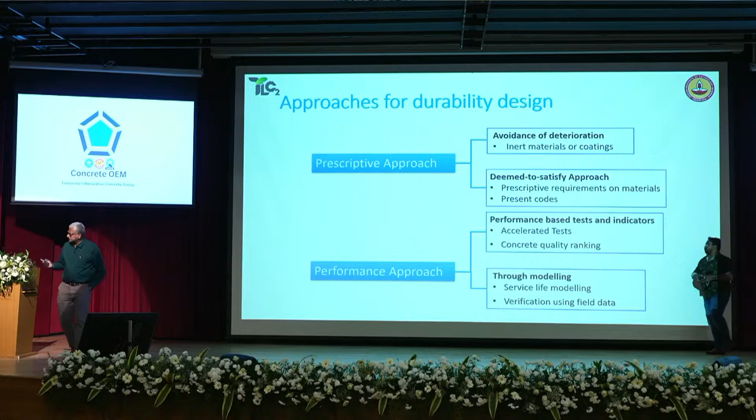It's off? Okay, fine, sorry. Yeah, so performance-based tests are typically available. Maybe we'll just use this. Yeah.

Currently, what we typically follow in our codes for control of concrete durability is a prescriptive approach, where we say you need to have so much cement, you need to design your concrete with so much water-cement ratio, so much strength, in order to meet the demands of durability in a particular service environment. But when I look at performance approaches, I'm not really worried about that as long as I can justify that my concrete is going to perform in a certain way.

Obviously, this requires a lot of understanding of how these tests work, what are the limitations of these tests, and how many of these tests you need to do to ensure that what you're actually producing in the lab will actually make it properly on site. Now, as we gain more experience with these tests and understand what the results mean, we're able to predict the properties of concrete.

Now, in India, a lot of the concrete is actually unregulated. More than 70% of cement produced in India goes towards residential construction projects. This includes masonry blocks, plaster, and site-mixed concrete. All of you are aware that a lot of this concrete on site is volume batched, where we have absolutely no control on the extent of water that you add in the concrete. So we are not even talking about durability in those cases.

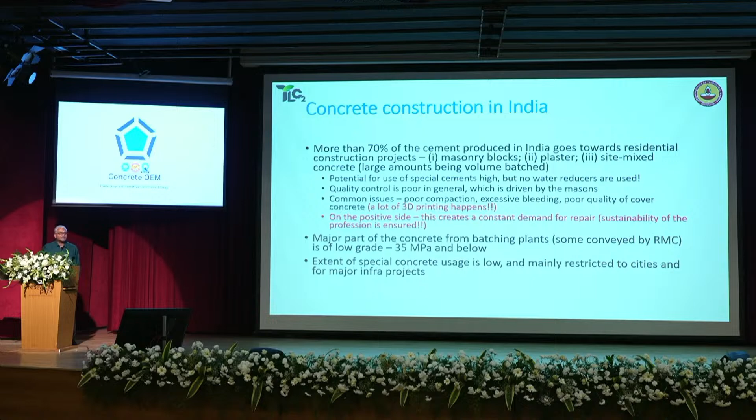So special concretes in such projects where not much regulation is there, where not much engineering actually happens, is quite low. But it is still there in cities and in major infra projects where people are increasingly using different types of special concretes. So what are the different types of special concretes that are used in India?

One is, of course, self-compacting concrete. Today, a lot of projects in India are being done with SCC. High-rise construction projects in cities are employing more and more of self-compacting concrete.

High-strength concrete is being used quite a bit, of course not as much in Chennai as it is in Mumbai. Mumbai actually has a number of projects where grades of concrete up to M100 are being used.

Fiber-reinforced concrete, Professor Gettu talked about it quite a bit. FRC is increasingly being applied for industrial flooring where it finds the maximum application. Also, of course, for tunnel linings, whenever in metro construction - that's become a huge opportunity now.

Radiation shielding concrete is a special type of concrete where we use heavyweight aggregate, and it's used in nuclear reactors. And grouts for pre-stressing tendons - Professor Pillai and our group at IIT Madras have been advocating the use of pre-packaged formulated grouts for pre-stressing tendons to ensure that the tendons are protected against corrosion throughout their service life.

And there are also other new applications like geopolymer concrete and 3D printed concrete that are increasingly gaining prominence because there are niche applications where these can also meet the demands.

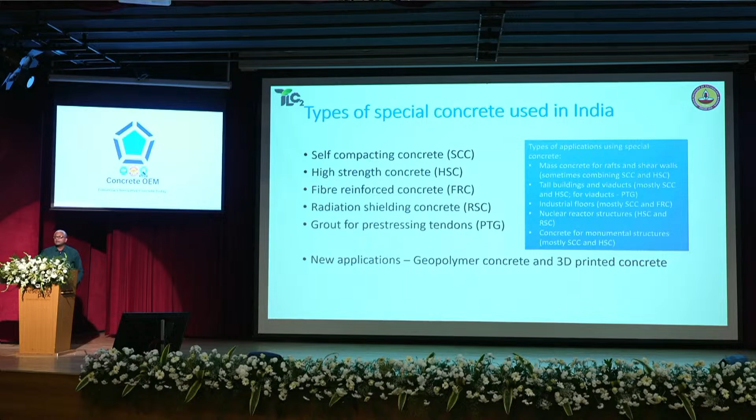Now, there are special applications, types of applications that require special concretes. We know that mass concrete for rafts and shear walls often combines the concepts of self-compactability and high strength, especially for shear walls, where high strength is typically needed. And in most cases, because of the reduction in construction effort needed, it's often advisable to go with flowable concrete like SCC.

Tall buildings and viaducts mostly use self-compacting and high-strength concrete, and for viaducts, post-tension grout is also being applied quite a bit. Industrial floors, as I discussed earlier, self-compacting and fiber-reinforced concrete find a major application there. Nuclear reactor structures use high-strength concrete and radiation shielding concrete, and monumental structures also use a lot of special concrete, especially self-compacting and high-strength.

So, realistically, if you look at all of the concrete in India, 90% of durability design scenarios will actually deal with such special concretes, because unless we really have a clear understanding of what the longevity of the structure needs to be, we are not really going to invest a lot of time and money into setting up the test protocols required for durability. So 90% of the time, when we are talking about durability design, we are looking only at special concrete.

So I'm going to talk about special concrete and what are the challenges in implementing these durability considerations when it comes to the site. One is specification. There is always an emphasis on minimum cement content in the specifications, right?

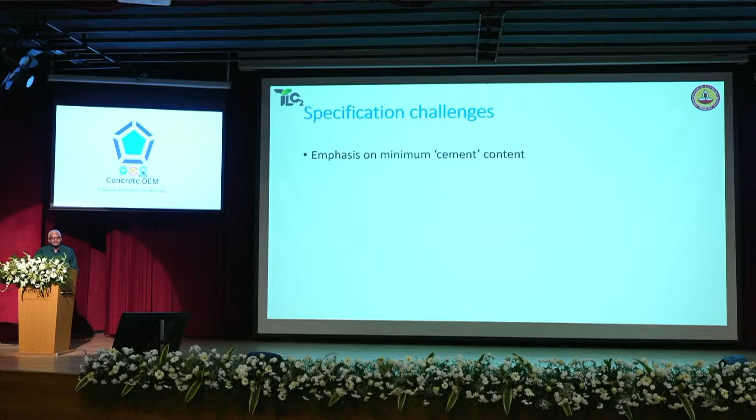Now, cement—if you even look at IS 456, many people don't seem to interpret this well. When they talk about the minimum cement content required for durability in different environments, it clearly says at the bottom of the table that it's inclusive of all the additions, right? When I say 360 kilograms cement in an extreme environment is needed, it is inclusive of fly ash or slag or silica fume or any of the permitted additives as per IS 456. Unfortunately, not many people pay attention to that. They still say minimum cement content.

There are no clear guidelines on quality assessment of SCM, supplementary cementing materials. That is one of the problems why people have not been able to adopt SCMs as much as they should, because very often the fly ashes supplied to ready-mix concrete do not have the right quality. Oftentimes the suppliers of fly ash do not ensure that the quality and consistency of this fly ash is maintained from batch to batch.

If you go to Western countries like the US, fly ash is available like a commodity product, like cement. You can buy bags of fly ash, and you can guarantee that these fly ashes satisfy a certain physical and chemical performance. And that really helps to push the case for regulating some of these materials to ensure that they're used in a better fashion.

The exposure classifications are not updated. Of course, this will change soon when we have our new IS 456 coming up. I'm hoping that within the next couple of months it will come out for wide circulation. So you will actually be able to see a lot better coverage of exposure classifications, which is important to understand what kind of durability problems are expected in a particular exposure environment.

There's not much coverage of durability testing in the specifications typically. And even if the durability tests are specified, there is no idea about the frequency of testing. How often do I test durability? Is it as often as I test strength? One needs to understand how these durability tests work to really figure that out.

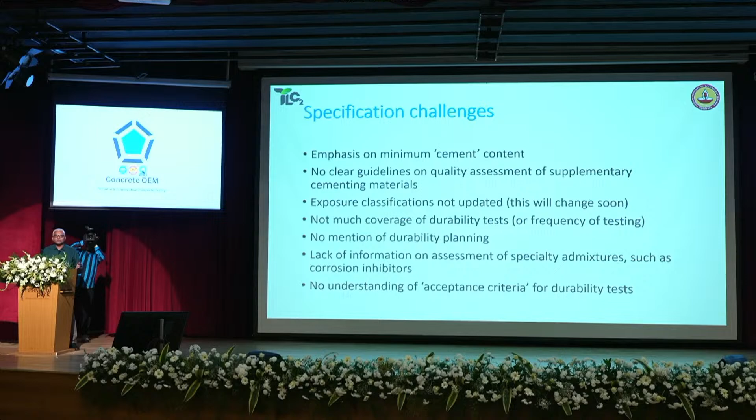When you test for durability, you need to look at acceptance criteria. You have to accept that there's going to be some variation in the site supplied material. Even for strength, acceptance criteria are fairly well defined. We have to do the same in order to get the best out of durability test methods once they are applied to production concrete.

Some examples of specification challenges and what kind of issues came up because of that. There's one project, I'm not going to name any of these, just projects I was involved in one way or another. Here, about 65 MPa concrete was being designed, and as per the spec, a minimum of 450 kilogram per cubic meter of OPC was mandatory. Not cementitious content, 450 kilogram of OPC was mandatory.

The spec also said that the temperature needs to be maintained at less than 50 degrees Celsius all the time inside the concrete. Now, any rough calculation will show you that 450 kilograms of cement will lead to a temperature rise of more than 50 degrees Celsius. Whatever temperature you cast your concrete at, you will get a rise of more than 50 degrees. So that means if you have to ensure your concrete remains below 50 degrees, you have to do concreting at 0 or negative temperatures.

Who's heard of these kinds of things? Unless, of course, you are planning to use cooling pipes inside your structure that will ensure the concrete remains less than 50 degrees all the time.

So again, this is an issue with the specification. They have not really understood the impact of using high amounts of cement on heat generation inside the concrete. And in this case, the contractor also did not bring up this issue during bidding, which got them into trouble later because the concrete on site was actually exceeding 80 degrees Celsius. They had to do a lot of explaining, the payments got delayed and so on. So a spec has to be carefully monitored, things have to be understood as to what is written in the spec, and we need to plan to ensure such issues don't show up.

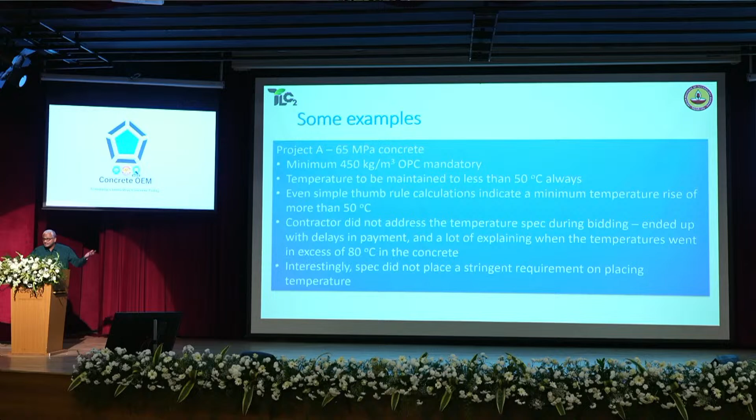The second project, it's a simple issue, I've already talked about that. The corrosion inhibitors were specified to be added integrally, but the test specified for the inhibitor was pertaining to migratory corrosion inhibitors. So it really did not make sense that this test was there in the spec.

In Project C, the RCPT, Rapid Chloride Permeability Test, Coulomb charge passed control value was specified as 1,000 coulombs. That means any concrete supplied needed to have an RCPT value of less than 1,000 coulombs. But the contractor was not permitted to use fly ash in the concrete mixture. Because if you've worked with RCPT tests, you'll know that any ordinary Portland cement concrete mixture of grade 40 to 50 megapascals is not going to get you 1,000 coulombs.

Unless you have a very, very low water cement ratio in a plain concrete mixture, you'll not get that. You have to use siliceous supplementary cementing materials like fly ash. So in this case, the contractor came up with an interesting solution. They said, okay, we'll not use fly ash as a replacement of cement, we'll show it as a replacement of sand. So they had fly ash in the mix, and ultimately got the concrete to show an RCPT value of less than 1,000. So again, it's not cheating, but what they've done is essentially not reduce the cement, but increase the cementitious content by showing the fly ash as a partial replacement for the fine aggregate.

Now, there are issues with site-based control that we have to deal with, and that's where durability planning becomes very necessary. Most quality control labs are not well equipped with durability test equipment. Usually, irrespective of the environment and the kind of tests needed to certify durability, it's found that only two major tests are done at every site: RCPT and sometimes the water penetration test under pressure.

So these are the two commonly used tests in most sites, but these don't always address the quality of the concrete or the assessment of durability in specific environments.

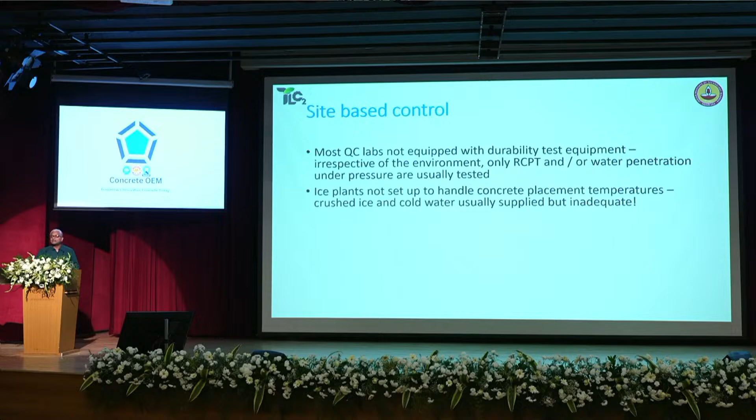The one major peeve I always have is in big construction projects, oftentimes ice plants are not set up to handle the concrete temperature issue. This is a real concern because we're increasingly dealing with massive concrete structures, high strength concrete and mass concrete, which baffles me. I don't know why specifiers or designers are putting high strength concrete and mass concrete together. Nevertheless, I'm not questioning that right now. I'm just saying you need to set up ice plants to ensure the concrete temperature can be controlled well. Early shrinkage cracking - there is not enough preparedness on site to handle it.

This planning needs to go in beforehand in case you really need to prepare a structure without cracking. Sampling for quality assessment is sometimes incorrectly done or not done at all. And quality of curing water on site is again not addressed properly. We have seen very often that if people start using groundwater which is rich in chlorides for curing, it can result in disastrous consequences.

Some examples I'll give you of site-based control where it led to problems. In the first project, 35 megapascal self-compacting concrete was used for a raft of 1.5 meter depth. Placement temperature desired was under 20 degrees Celsius - the spec said you have to make concrete under 20. There was no ice plant on site, but crushed ice was supplied. Luckily, the cement was replaced massively by fly ash and slag - 70% cement was replaced, 40% by fly ash, 30% by slag - because of which, even with this control of water quality and temperature, we could still manage the concrete to be less than 20 degrees Celsius.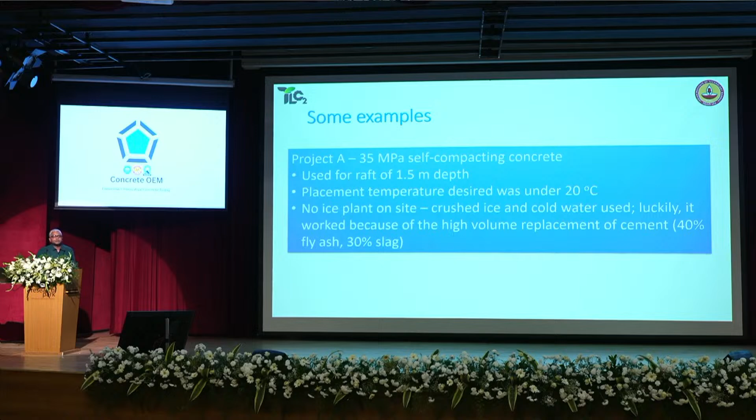In the second project, actually a building inside IIT Madras, there was a large terrace slab placed with continuous concreting using 35 megapascal SCC. At the previous floor levels, the concrete was placed over a period of 8 hours during the night. Now, we heard from Professor Gettu about plastic shrinkage cracking.

The important thing is to ensure that you don't allow cracks to develop - workmen have to be there on site. In case early curing is not done, people have to be there to see where cracks are appearing, use a wooden float, rub it. Very simple way to ensure the cracks go away in the beginning. No workmen were there on the site. People came back the next day - lo and behold, lots of plastic shrinkage cracking. You have to have statements of methodologies to repair these cracks to ensure water does not seep through and so on - additional cost which could have easily been avoided by having extra workmen.

So next time this placement was done for the higher floor, the terrace of the next floor slab, there was a large team of workmen to observe cracking and float immediately. Absolutely no cracking was there. This was all self-compacting concrete, and no cracking occurred when these workmen were there to do the floating when the cracks appeared. This happens very early, during the first couple of hours after placement, that you start seeing these cracks.

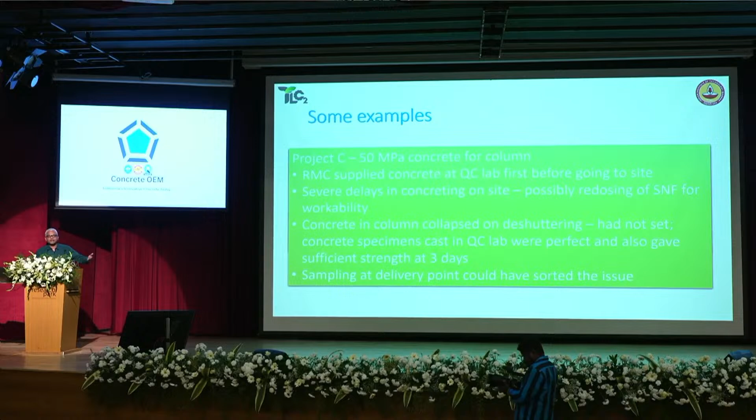In this third project, 50 MPa concrete was supplied for a column. As is usually the case, the truck arrives on site, first goes to a QC lab, dumps the concrete required for preparing cubes and cylinders and other quality assessment in terms of workability, then goes to the site and delivers the concrete. In this case, when it went to the site, the site was not prepared - the reinforcement was not ready, formwork was not properly ready, and so on. It took some time for the concrete to actually be put into the structure.

Now, when concrete gets delayed on site, what happens? Slump gets reduced. When slump gets reduced, the old technique was to put water to increase the slump. Luckily, people have understood that this is a problem - more water means less strength, less durability. Now we start adding chemical admixtures to ensure we can retain the slump. Here, they overdosed so much that the concrete just did not set.

The next day, the foreman saw the concrete - the top of the concrete had dried, so they tapped the top, thought it was dry, and opened the column formwork.

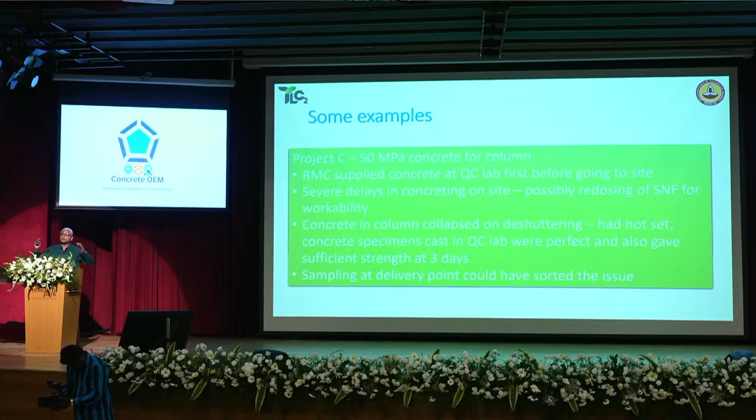The entire column collapsed. There was absolutely no setting in the concrete. On the third day, when I went to the site, the concrete still smelt of sulfonated naphthalene formaldehyde. I could smell that the admixture was overdosed so much.

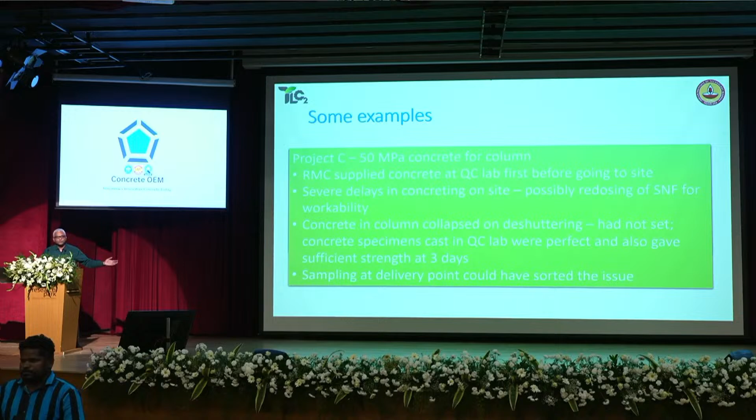Then I went to the lab and saw the cubes cast from the same batch of concrete. The cubes were perfect. We tested them, and they gave perfect 3-day strength. This goes to show that you need to ensure sampling for strength testing is done at the point of discharge of the concrete. If the cubes had been prepared at the time of discharge, we would have understood that something was wrong with this concrete. But instead, they opened the formwork and the concrete collapsed.

The site needs to be prepared when the concrete is supplied. You can't keep waiting. I often link concrete with cooking. Fresh food always tastes better, and fresh concrete always performs better.

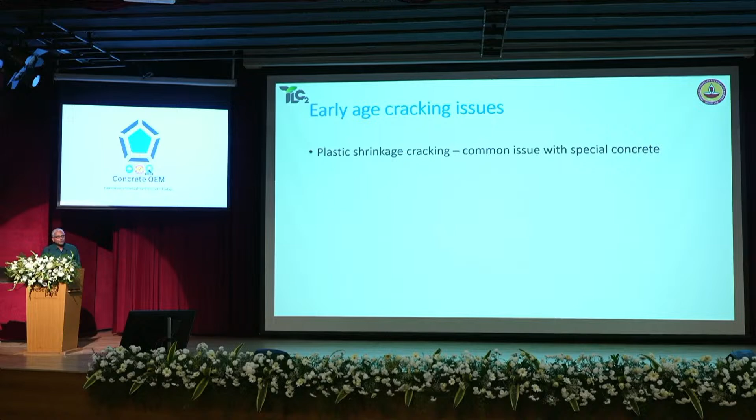Now, early age cracking. I don't know how many of you were there in the talk yesterday, so I'm sorry this is a bit of a repetition. I talked about early age cracking, and some of those examples are here again. Plastic shrinkage cracking is a common issue with special concrete. As Professor Gettu mentioned, the more additives you have—fly ash, slag, chemical admixtures—the more your propensity to crack goes up. So you need to plan so you don't get this cracking at all.

An emerging issue is thermal cracking. Specs don't place stringent requirements on placing temperature, and temperature rise studies aren't mandated unless you're doing mass concrete like a dam or a massive raft. But these days, many columns and shear walls in high-rise buildings, and our viaducts, are actually classified as mass concrete because they're 2 or 3 meters thick. And temperature development models are not used.

Importantly, these models are often necessary to understand when to remove formwork. As Professor Gettu alluded to, you can insulate members to ensure heat loss doesn't happen from the sides, minimizing the temperature differential. In massive structures, it often helps to keep formwork on for as long as possible so heat doesn't dissipate fast. It's preferred to use plywood formwork instead of steel to ensure heat doesn't escape rapidly. And there's often no clear plan for curing.

Very often with massive concrete structures, they simply remove the formwork and start pouring water directly. The problem is, if you already have a temperature differential, pouring water will increase that differential and you'll certainly get cracking. Sometimes we have cracking due to external restraint, or we're in a hurry to place longer stretches, and if you don't provide sufficient reinforcement, you're going to have a problem.

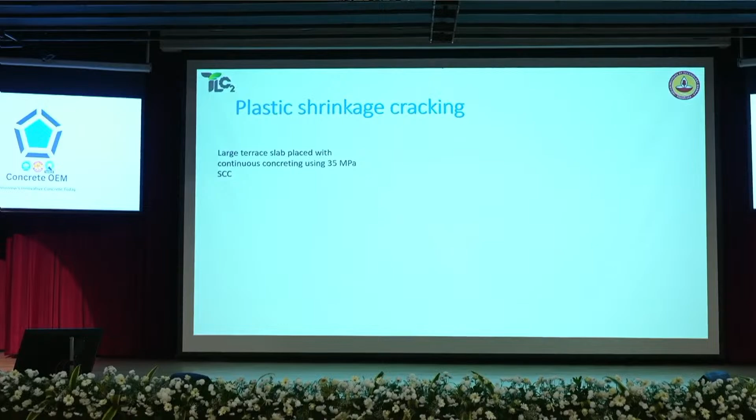So next time, we had workers with a wooden float to ensure we didn't get these cracks forming. You need to have these people available on site in the first couple of hours after placement, or at least for the first 6 hours after placement.

Now, this is a shear wall of a multi-story building with 60 MPa concrete. There was no clear plan of temperature control in this case—people didn't think about it. They just struck the formwork at 24 hours, just like usual, and at that time the peak core temperature was actually 75 degrees Celsius. But no temperature modeling was done, so they didn't really know what the peak temperature inside was.

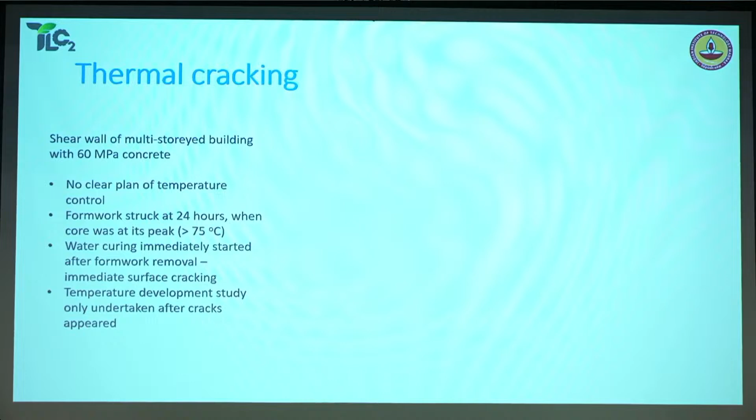This was another project in which a plain concrete raft was done with 35 MPa self-compacting concrete. All precautions were taken to ensure that plastic shrinkage cracking could be avoided. But here, one issue that came up was the length of placement was about 27 meters, and these were 9 meter wide strips. So massive.

Because of all the precautions taken to avoid plastic cracking, it came out absolutely beautifully. The top surface showed no cracking at all the next day. But the problem was, since the base was so long, 27 meters, the concrete needed joints. So it automatically cracked after about 10 to 14 days in perfect strips of 9 meters.

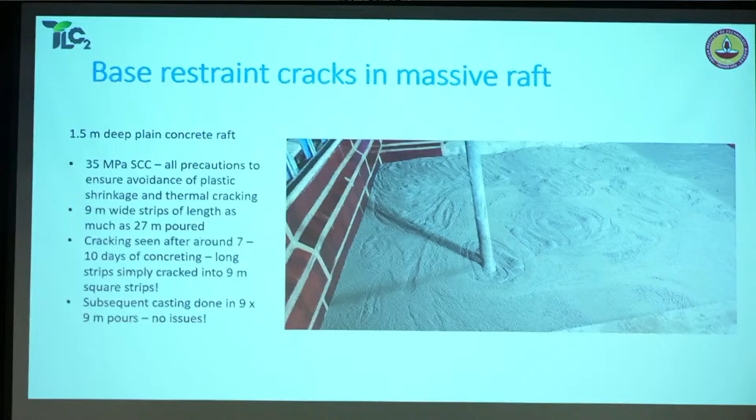Now, that doesn't mean that it failed. It just showed that that should have been the size of the slab you first did. If you follow well-designed, defined design procedures, you'll know this is actually true for that kind of depth of slab. More than 9 meters placement is likely to result in very high levels of stress.

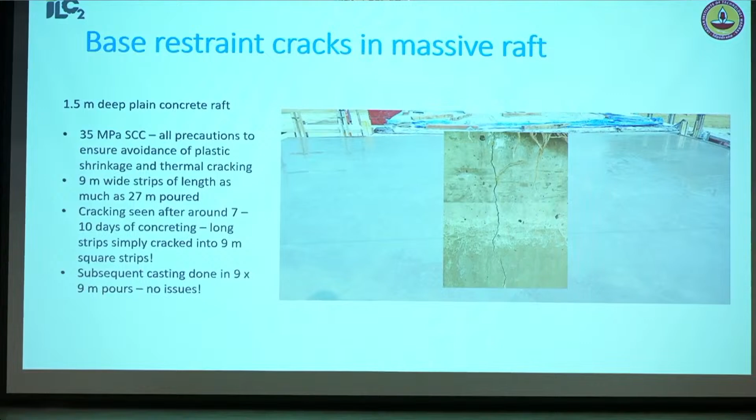So subsequent casting was done 9 by 9 meters. There were absolutely no issues in this project. So this is again showing you the top surface perfectly, with all possible precautions taken. This is the cracking that actually appeared because of the base restraint.

Just to summarize, I've talked about several issues. It's important to have durability planning as a key to any project, especially those involving special concrete. We think that when we use special materials, it doesn't need so much attention from our part, but we are wrong. The more special the materials in your concrete, the more quality control that is demanded in a construction project.

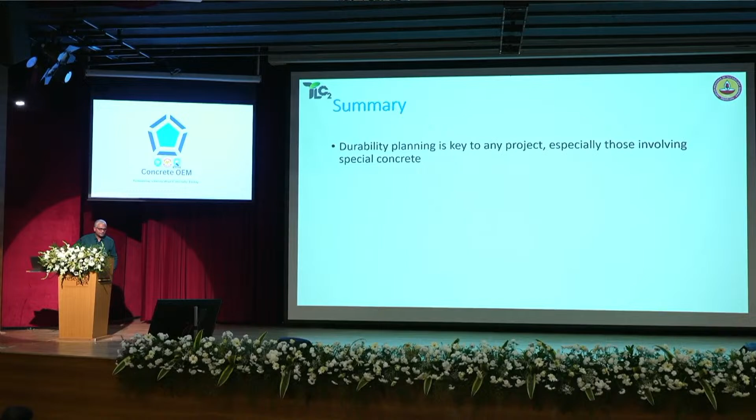Specifications have to be carefully written. Each job is different. These days, cut and paste is gone. Now we have AI. We can get AI to write specifications today, but AI cannot understand that site requirements are different. AI can have its place in understanding what aspects to bring into specifications, but we have to have NI to use the AI. If you don't have NI and just rely on AI, we are simply not going to be able to execute projects well. Site should be prepared for operations expected for the needs of the special concrete.

Again, if the special concrete is likely to result in very high temperatures, the site should have an ice plant to ensure that the concrete can be supplied at a controlled temperature all the time. If the concrete has a propensity to crack, we have to take all possible measures to avoid plastic shrinkage cracking. Cracking is very important to resolve.

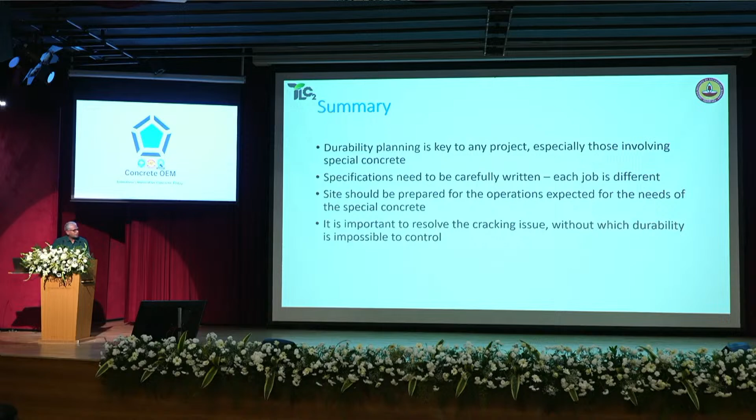Again, for durability, we know that we use special concretes of low water cement ratio, high supplementary cementitious materials dosage, higher strengths, and so on. But what's the point of having durability when you have cracks? Water or chemicals will not find their way through the concrete - they'll go right through the crack. Why do they have to worry about trying to penetrate through dense, impermeable concrete? You need to have crack-free concrete. Only then can you actually execute projects which can last for a very long time. Thank you all very much.